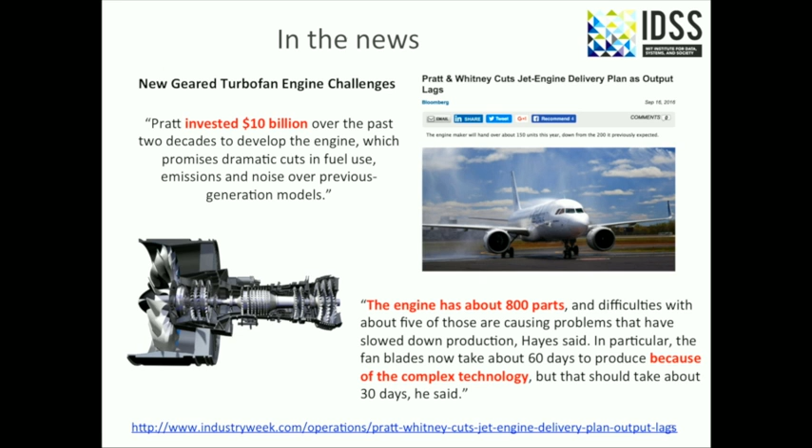And the complexity increase is so large that the production targets and the integration of this engine onto the airframe has been much slower than expected, to the point where promises and delivery schedules have had to slip, and it potentially has a big business impact. So the increase in complexity has a direct impact on promises, delivery schedules, and eventually market success of the engine.

Okay, but let's go back a little bit in history. So one thing I always try to do, I have a fairly long commute, I live out in Metro West, is to listen to audiobooks. That's my way to make the commute palatable. And I listen to about 20, 25 books a year, which I greatly enjoy.

So I want to tell you about a book, but what have you guys been reading lately? Maybe not related to work. Any great books people have read recently? Yes? Habits. Habits, okay. What is that about? The pattern of habits. Okay. Break habits, change habits, both people and organizationally. Interesting, great. And who's the author of that? Okay. Great. Unfinished Business. Any others? Scarcity. Okay. Scarcity, it's about how scarcity affects our cognitive capacity. Oh, interesting. The Generals, it's about the history of the American military cultivating leadership and swapping people out for different leaderships, it's a historical book.

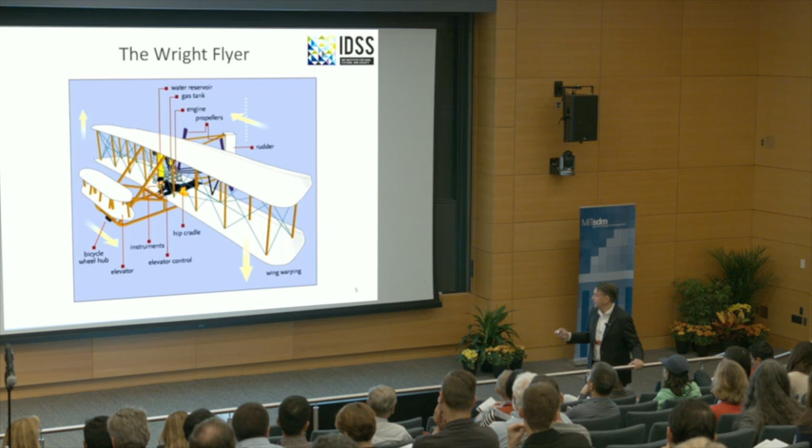And actually, what a lot of people don't know is, in 1916, 100 years ago, when our campus here in Cambridge was opened, this was the first time that the Wright Flyer was reassembled and displayed to the public in the US, in what's today Building 33, where I have my office. So let's take a look at some of the details behind the Wright Flyer. And it was a very elegant architecture.

So essentially, the Wright brothers were bicycle builders, so they used a lot of their skills and materials from building bicycles. So we have the elevator here. This is for pitch control. And what's pretty unusual today is this hip cradle. So the hip cradle, basically, the pilot would slide his hip back and forth, and this hip cradle was connected to cables to the wingtips, and this is what would warp the wings to provide roll control.

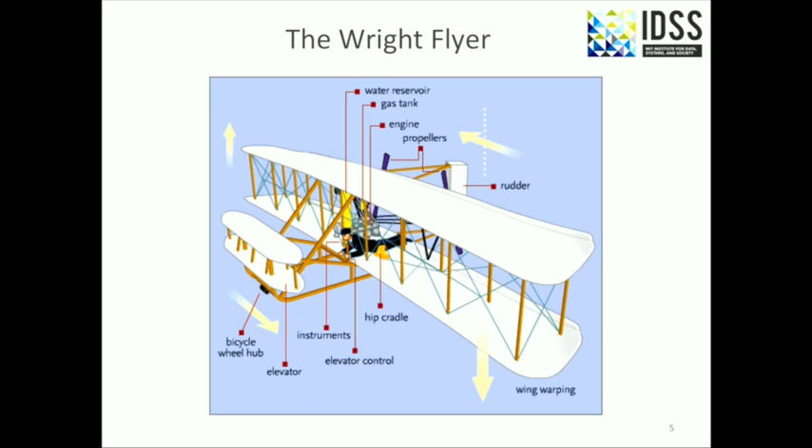Much later, that was replaced with ailerons, right? Rigid flight control surfaces. They did have instruments, actually. They had a couple instruments. There was a stopwatch. The engine development is treated extensively in the book. This was a big, big advance to provide an engine that had sufficient power to weight ratio to achieve flight. And the rudder, of course. And then there was a water reservoir, gas tank, really just the bare bones essentials.

So then let's fast forward. Many of you have heard of Augustine's Laws. Norm Augustine, former chairman of Lockheed Martin, wrote a book starting in the 80s called Augustine's Laws. It's been quite successful. This is 1997, the 6th edition. And there's a bunch of laws which mainly are extrapolations. And some of these extrapolations seem really far-fetched. But the reality is many of them we're still tracking on.

So this is Augustine's 16th law. So here's the Wright brothers. We just talked about them, 1903. And this is essentially the cost of a single airplane, right? And then here's time with some projection. These are mainly military aircraft, but if we look at how the cost of an individual aircraft has increased, and then we extrapolate the defense budget and the gross national product, this would tell us by 2054, the entire defense budget could only buy one airplane.

And then the services have to share, right? The Navy gets it on Monday and Wednesday, and the Air Force on Tuesdays and Thursdays. And then, by the 22nd century, it'll match our gross national product. In every edition of the book he sort of updates it, and we're still on that trend. So the question, of course, is what's going on, right? Why this escalation in cost?

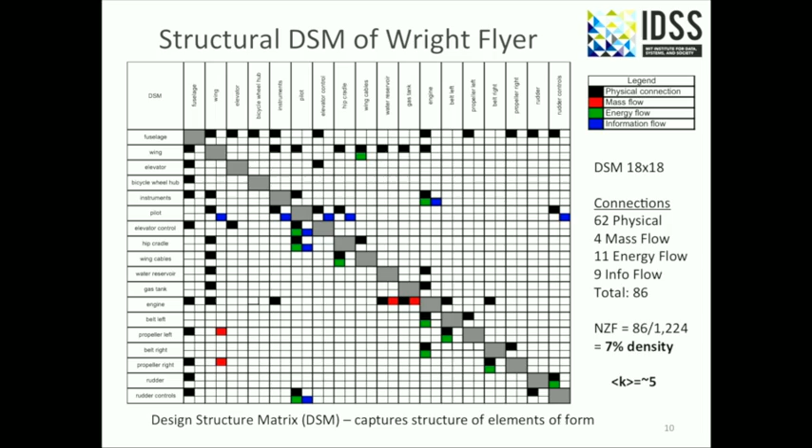So in total, we have 62 physical connections, 4 mass flows. That's mainly the fuel and the air and the water for cooling. 11 energy flows, 9 information flows. So there were some instruments, very primitive, a pressure instrument to measure the airspeed and a timer, essentially. 9 information flows for 86 total connections.

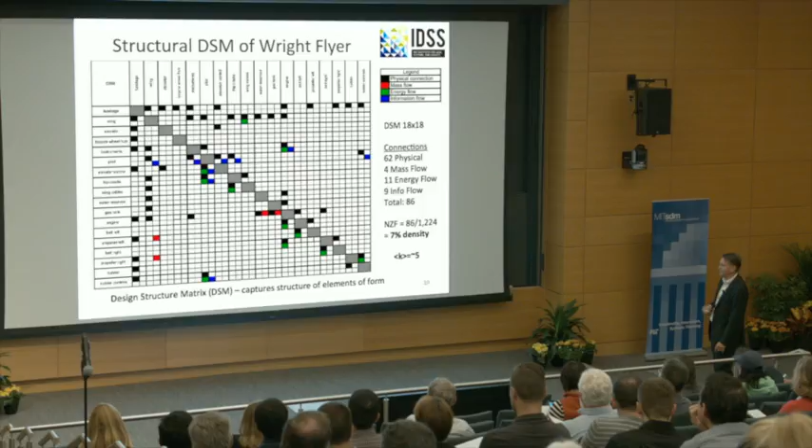And if we look at the density, how many connections are there in the system over the total number of components, we get a density of about 7%. The other interesting thing we'll come back to is each component in this architecture has about 5 interfaces on average. 5 interfaces, and that's our K here, that's the nodal degree. And we'll come back to that number 5 or 6 later. All right, so that's hopefully motivation for why we care about complexity.

So now, how do we quantify complexity? And there's a huge literature on this. There's a journal called Complexity. There's a lot of work. And one of the people who has really written about this very deeply and has been recognized for this is a lady called Elaine Weyuker.

She is a software engineer, and she was really interested in quantifying the complexity of software. And she said, no matter what metric of complexity you're proposing, it should meet these criteria, Weyuker's Criteria. A valid metric of complexity should demonstrate the following broad characteristics. I'm not going to go through all of them, but just highlight a couple.

So, for example, it should be invariant to relabeling. Just by relabeling or reordering, for example, the DSM, it shouldn't impact the complexity. You should be able to have different architectures at the same complexity level. The system structure, the structural complexity we talked about, should at least partially determine the complexity of functionally equivalent systems. Changing the subsystem interface patterns should have an impact on structural complexity. So essentially, Weyuker's criteria are a test that you can apply to any proposed complexity metric.

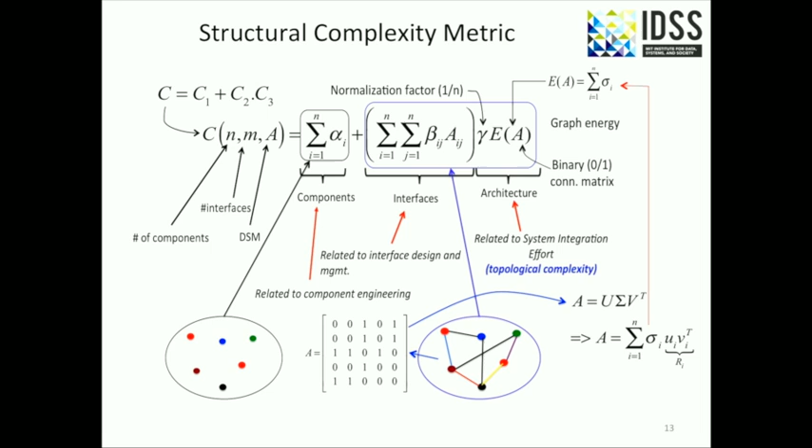How do we calculate graph energy? It's actually a very elegant, easy calculation. Given a matrix A, this is our DSM or adjacency matrix, we do a singular value decomposition, which is like the eigenvalues of that matrix, and we add up all the singular values. That's the total matrix energy of that system. And we'll look at some examples.

So where did this come from? Where did we find this? How did we adapt this? It turns out that in quantum chemistry, this has already been done. So in chemistry, the question is, how can we quantify rigorously, based on physics and chemistry, the complexity of molecules, in particular hydrocarbon molecules?

So here's a molecule. It has two benzene rings. You can represent it as a graph. This is the matrix of bonds, right, that the molecule is made up of. And it turns out that it's the Hamiltonian. The Hamiltonian, so this is not Hamilton on Broadway, right? We all know Hamilton on Broadway. That's a different Hamilton. This is Sir William Rowan Hamilton, who lived in the 19th century and reformulated Newtonian mechanics.

And essentially, what we find is that the molecular energy is essentially a C1 plus C2 C3 equation. So the first term is the energy of each atom on its own, right, in this molecule. And a hydrogen atom will have a different energy from a carbon atom. And then the second term essentially is the energy that's in the bonds and in the molecular arrangement.

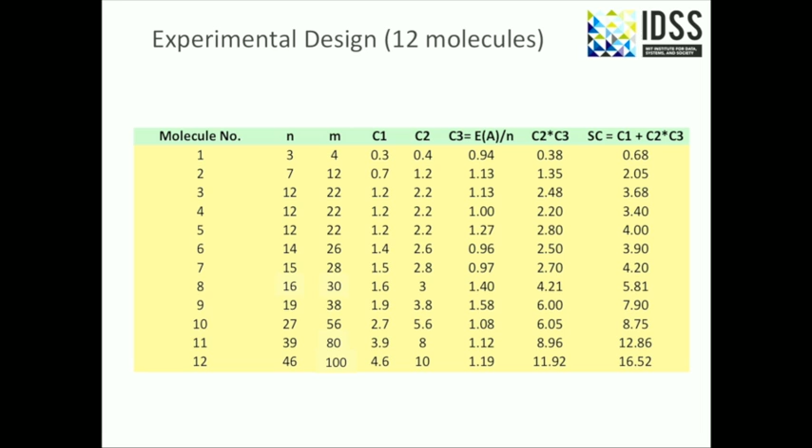So we designed the experiment. We picked 12 different molecules of increasing complexity. N is the number of atoms, from 3 to 46. M is the number of bonds. Here's your C1, C2, C3, the three components of complexity. And then here's the total structural complexity, which goes from about 0.68 to about 16. So roughly 1.5 orders of magnitude increase in complexity.

We conducted the experiment with, in this case, 17 test subjects. And this is the mean build time in seconds versus the structural complexity of these molecules. Each point here shows the average build time as molecular complexity increases. And what we're interested in, of course, is the shape of that curve.

And what we found is, this is the functional form of this solid line: Y equals a x to the b. Y is the total build time. X is the complexity. And we were really interested to know what is b, this exponent. And what we found is that the exponent is very close to 1.5, about 1.48.

So what that means is if you increase the complexity of the system by, say, 50%, the actual cost of building that system is going to increase more than 50% because of the superlinearity. But it's less than quadratic.

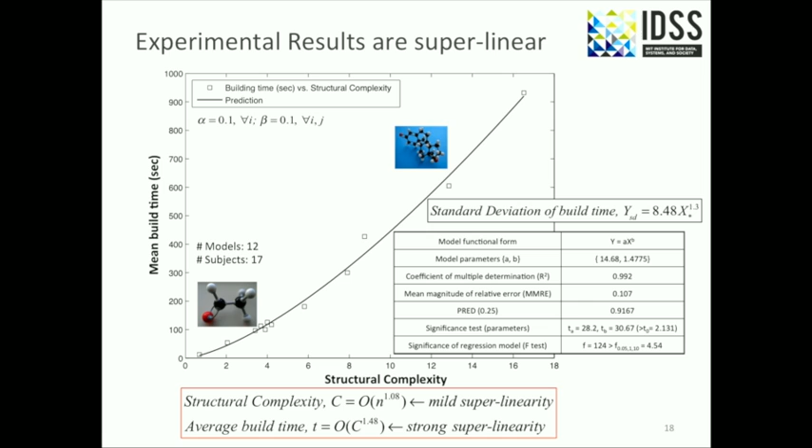And when you look at stories about this project being over budget or under-delivering on its promises, we think one of the major reasons is because this effect is ignored. You increase the complexity, but the effort to deal with that complexity increases superlinearly. And people don't know that or forget that. So that's important.

The other really interesting thing we found, and this is more of a qualitative observation, is that there were big differences among the individuals in the experiments. Some people are much better than others at handling larger levels of complexity. You can see this by looking at build time, or complicatedness, the perception of complexity, versus the actual complexity. Some people are on this curve, and as complexity increases, they hit the wall, right? They just can't deal with this.

And other individuals change what they're doing as they hit a certain complexity level. And then they're on a different curve, and then they change again. You can see it in the experiments by looking at what people actually do. Some people assemble a really complex molecule the same way as a small one.

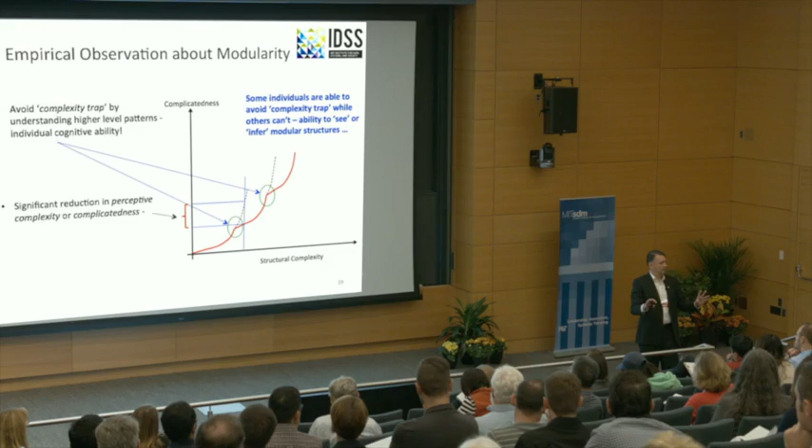Other people step back at the large molecules and say, wait a minute, there's structure here. There are modules here. Do you remember those benzene rings? So they say, I'm going to split this and do pre-assembly of the modules. They see the modules. They see the system at a higher level of abstraction naturally. And other people can't do that, or they don't see it naturally.

It's really interesting. So getting back to Weyuker's criteria, here's a list of complexity measures that have been proposed in the literature. Number of components, number of interactions. Dan Whitney, who spent many years with us, did a great job in this area as well. Number of loops, nesting depth, Kolmogorov complexity, et cetera. And then is it actually computable, and does it satisfy Weyuker's criteria?

So we claim that this particular measure of complexity that includes matrix energy is relatively easy to compute and satisfies all of Weyuker's criteria. So that's why we're using it, and we think it's rigorous.

Okay, the last part of the talk is really how do we manage complexity better, knowing what we know now. So first of all, when you look at an architecture of the system, maybe the fundamental question is: is it a centralized architecture or is it decentralized?

This is a big question. It's in the internet, in transportation. Should we have a few elements that are the hubs, the dominant elements, or should we have a more spread out architecture? That's one of the very first order questions when you look at architectures. And it turns out that our C3 term gives us the answer to that question.

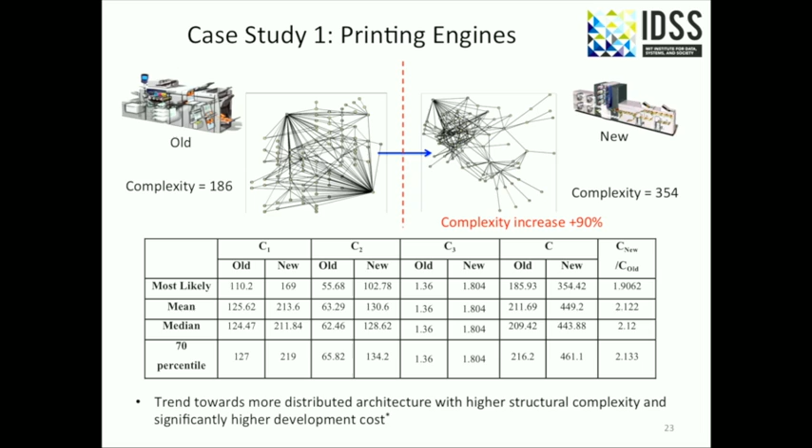And we can look at it probabilistically. The interesting thing is, if we look at, again, the C3 term for the new machine over here on the right, and then the older machine on the left, it has a C3 of 1.36, the new machine of 1.8. So we're still in this middle regime of hierarchical architectures, but we're moving much more toward a distributed system.

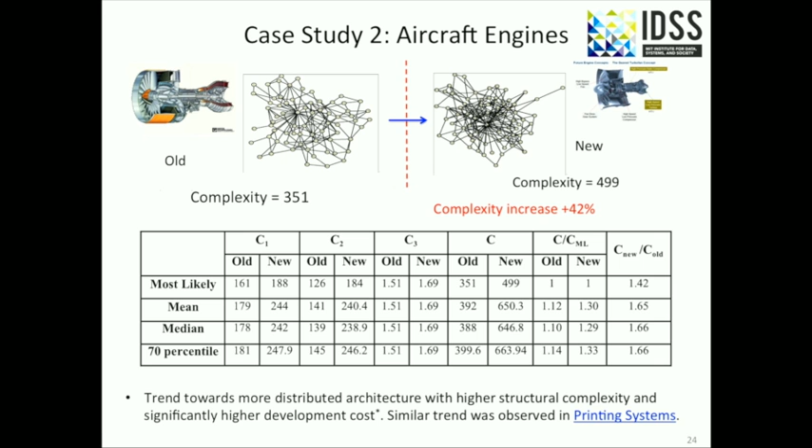And that's what I was saying earlier. You put in a gearbox, you put in a new technology, but now it's all the other things you need to do to integrate that technology: the controls, the cooling system. That was the big driver on complexity increases here. And all of that has to be tested and certified under all flight conditions.

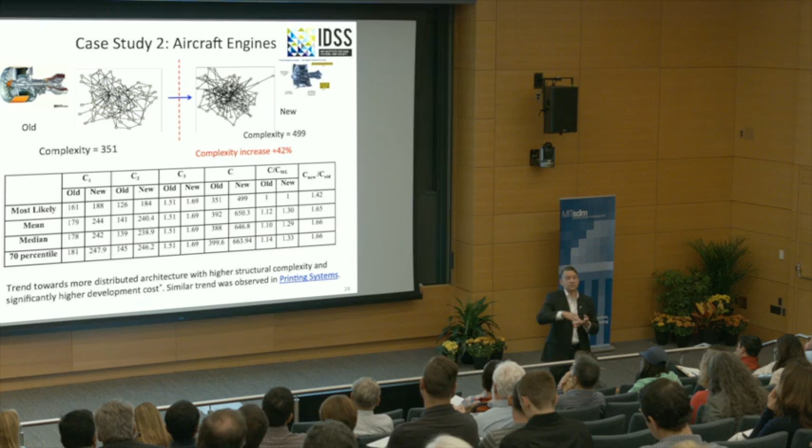And the big challenge has been, in particular, the startup of the engine. Once the engine's running at steady state, it's not as big a challenge, but it's getting the engine started up quickly and reliably. That's been the big challenge.

So 42% increase in complexity. And as we saw from our experiments, that doesn't mean 42% increase in the R&D budget, right? The actual increase in R&D effort is more than 42% because of that nonlinearity, because of the human cognitive limits. And that's what's often forgotten.

So let's talk a little bit about underlying fundamentals. I told you, at MIT, we always get challenged every day. And one of the challenges is always, what are the fundamentals? What are the fundamental insights, laws, theorems, things that really are at the basis of what you're doing?

We found a couple of quite interesting things. One is the idea of a P point. So P stands for phase transition. And that's essentially the idea that in any system or product, there's a tipping point in complexity. You can increase complexity and you get benefits for it, but there will come a point where if you go beyond this point, the P point, it's not worth it anymore. You continue to increase the complexity and cost, but you're not getting the benefit for it.

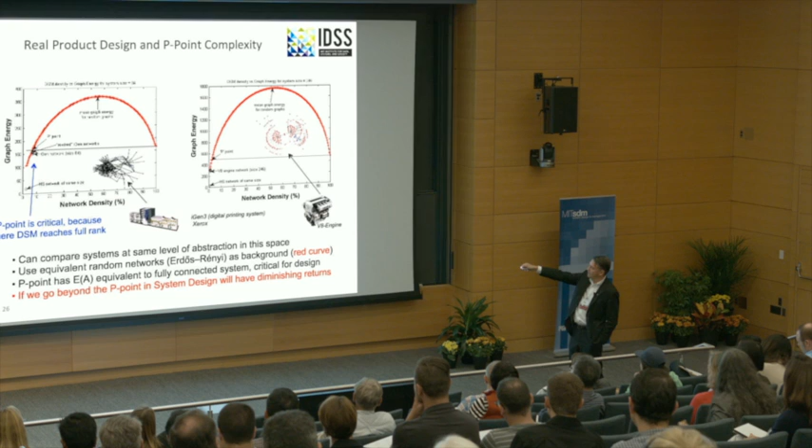And what we found, lo and behold, is most real products are right at or right below the P point. So here's the printer, here's a V8 engine. And what this says is, look at your systems, look at your products, quantify their complexity, and look whether you're at the P point or above. And if you're above the P point, you're essentially at a point where increasing complexity more will probably not yield value.

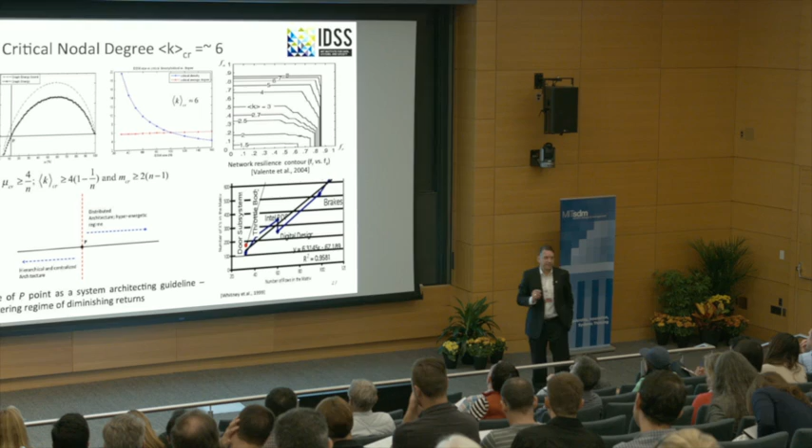There's another remarkable thing that happens at the P point, and this gets to the average number of interfaces or connections per node. So here's again our P point. So when we look at the size of the system, in this case the design structure matrix, versus the number of critical connections, where the matrix essentially becomes full rank, we can see that even though the critical density is dropping as the system gets bigger, the critical average degree is constant. That's remarkable. That's a remarkable property.

So about 6 connections per part is the critical number of interfaces per part at which the system becomes full rank and where the P point is reached. And there's a lot of other research that says that this nodal density of about 6, or this average degree of 6, is critical. This is work by Valente on network resilience.

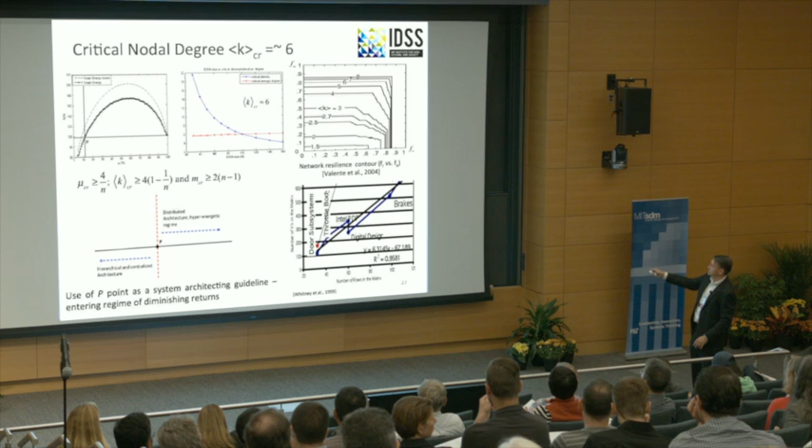So this is where you have a network, and then you have either random or targeted attacks on that network by taking out nodes or edges in the network. And the question is, will it still work? And so this is the residual, essentially the performance of the system as a function of number of nodes or edges knocked out. And you can see, again, the contour here with 6.

This is some of Dan Whitney's earlier work where he looked at DSMs, the number of marks in the DSM versus the size of the DSM for things like the Intel product development process, throttle body, a door subsystem. And he basically did a regression and found that the regression is y equals roughly 6.3x minus 67. The interesting thing is the 6, right? Very, very fundamental. What was the number of average connections in the Wright flyer?

5, right? Below that, just below that limit. So we think that's critical. So talking about managing, how does this help us manage complexity better? Well, let's think about this again.

So we have structural complexity over here. This is the actual physical complexity of our products or services, whether it's a software platform, a physical system. That's measurable objectively. That's not in the eye of the beholder. And then we're filtering this through a human cognitive process, whether it's an individual process or a team-based process. And that's our perception of complexity, which then leads to the actual effort, the system development cost. And we've seen earlier in the experiments that the relationship is nonlinear.

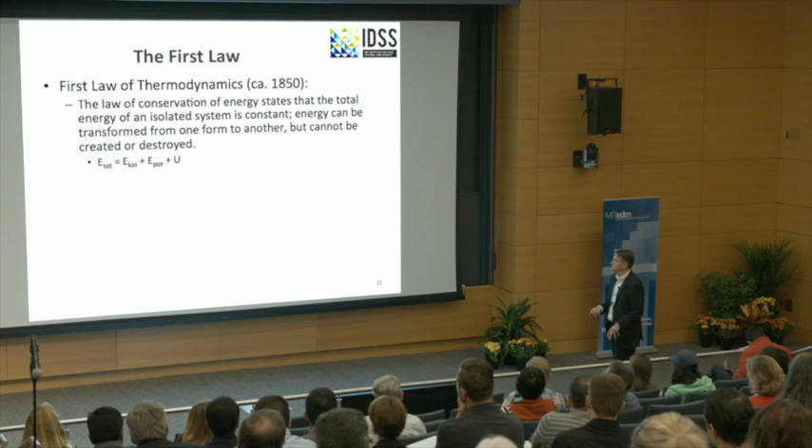So then finally, what's the first law? When you look at first laws in engineering science, this is what you'll find most likely. The first law of thermodynamics, about 1850. Most first laws in any field are conservation laws. Conservation of mass, in this case, conservation of energy, and it says that the total energy of an isolated system, so you have a system boundary, a control volume, is constant. You can only transform energy from one form to another. You can't create or destroy energy in a closed system.

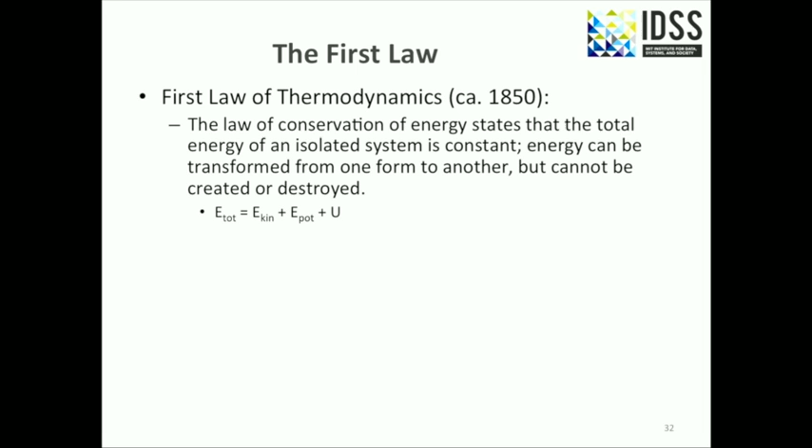And these are the three terms: the kinetic energy, the potential energy, and the internal energy of the system, this term U. And it's pretty interesting. We take this for granted, but it took almost a century for the first law of thermodynamics to be universally accepted. There was a lot of back and forth, a lot of reformulation, and now it's solidified and generally accepted. In system engineering, we're basically where the thermodynamicists were in the 19th century.

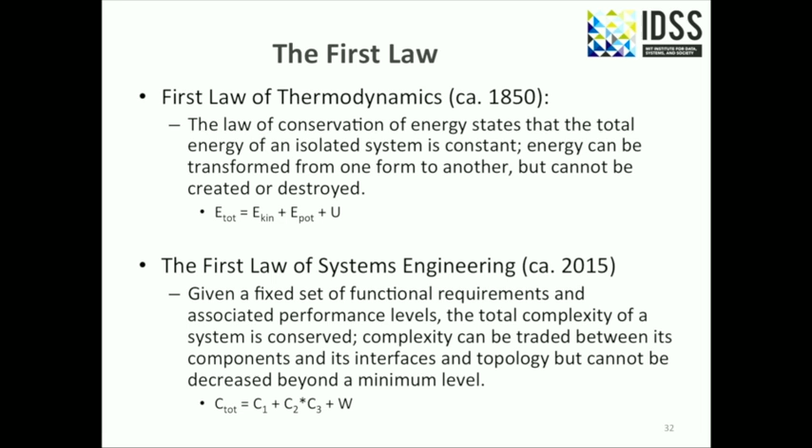Okay? So here's what I would say is the first law of system engineering, mirroring the first law in thermodynamics. And the conserved quantity here is complexity, conservation of complexity. So given a set of functional requirements and associated performance level, the total complexity of a system is conserved, and complexity can be traded between the components, the interfaces, and the topology, but you cannot decrease the complexity beyond a certain limit, given what you're asking the system to do.

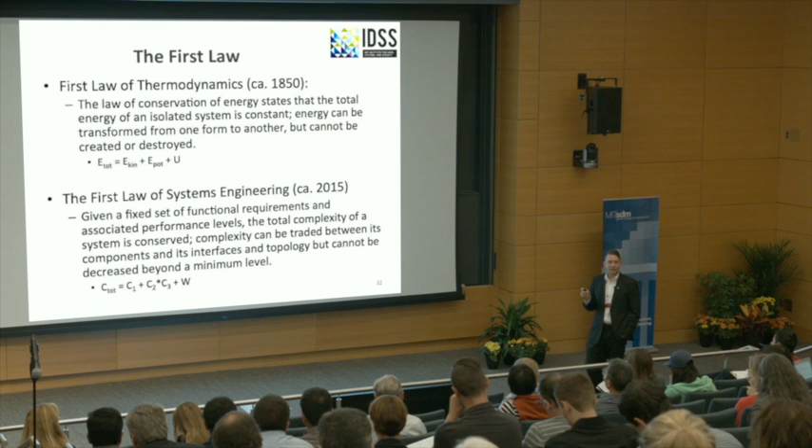And so, the total complexity then is C1 plus C2 times C3, plus this term W, which is the equivalent of the internal energy, and that's the one we're really still trying to figure out. What does that really mean? That third term, that's one that we're still researching.

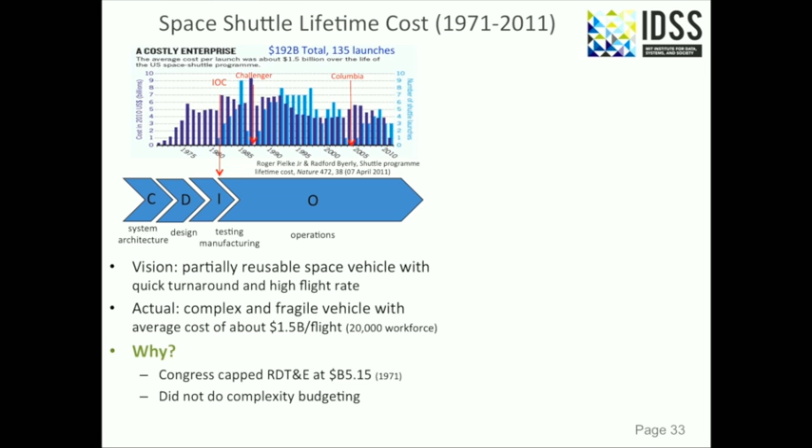Why does it matter? Finish with this example, the space shuttle. You all know about it. It was retired in 2011. There's a really interesting paper by Pielke that came out in Nature on the history of the shuttle program. So number of flights, total money spent, about $192 billion we spent on the shuttle, and we got 135 launches out of it. Great system, but very complex, very fragile in a sense.

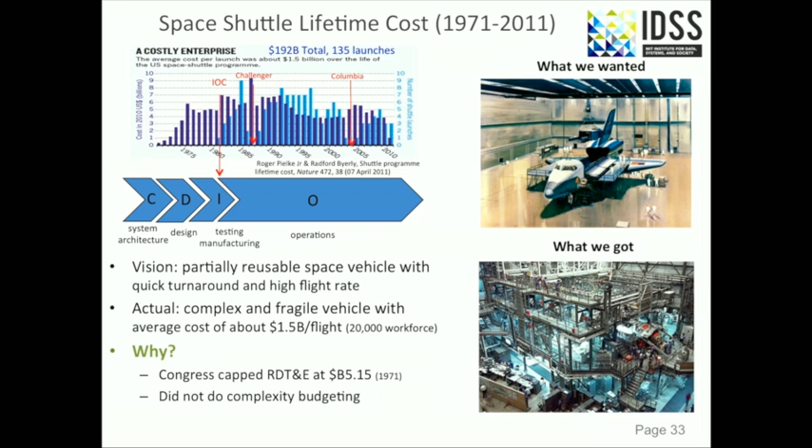And this is the vision, right, what we wanted. This is a figure from the 70s when the program was essentially started. And then this is what we actually got. Right? The orbiter's in there. This is a picture from the orbiter processing facility, and the effort that it took to get the shuttle turned around for each flight was very large.

So I think with better complexity management and explicit complexity budgeting, going into the future, hopefully we can avoid surprises like this. So with that, we talked about why you should care about complexity, how to quantify it, and how to better manage it, and it's an ongoing journey and an ongoing challenge. So let me just summarize.

Structural complexity has been increasing steadily since the Industrial Revolution, and that'll continue. It's really driven by competition, customer needs. These three types, functional, structural, and organizational complexity. The human cognitive bandwidth limitation, this magic number 7 plus or minus 2, we talk a lot about it in the SDM core. The idea that the complicatedness, our perception of complexity, really drives superlinear costs and effort with that exponent 1.5.

Rigorous measures of complexity, there's a number of them, but we're very excited about the one that's based on graph energy. We think it satisfies Weyuker's criteria and has these three major elements: component complexity, interface complexity, and then topological complexity. And where we need to go collectively is better complexity management. And the good news is there's some real anchors for us to do that. The P-point, critical transition, the critical nodal degree of 6, and then the idea of isocomplexity-based budgeting.